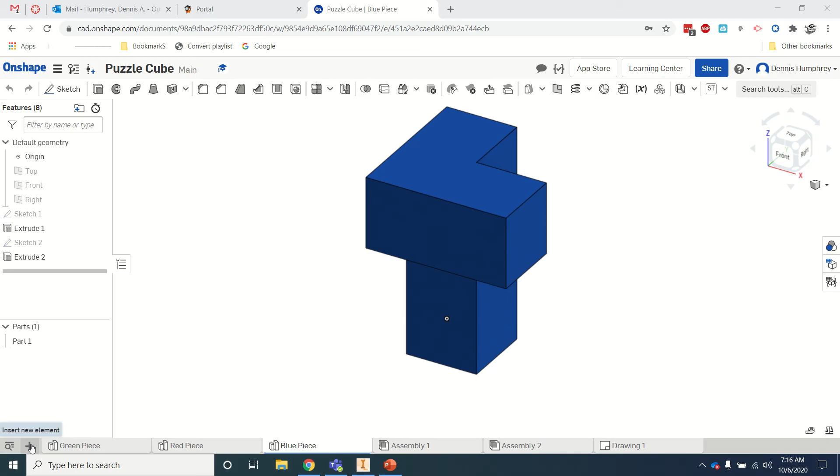Alright, so this is instructions on how to make a multi-view drawing using Onshape for your puzzle cube. Okay, I've got these same three pieces down here. To do one, I click on the plus sign down here at the bottom, and I want to create a drawing, create drawing. When I click that, this pops up.

Select the ANSI A inch. You want A and you want inches. A and C are different size sheets. C is really big and parts of it have to get scaled. A, everything fits very nicely. So I pick that, I click OK. No views at the bottom. Wait for it. And there is your drawing.

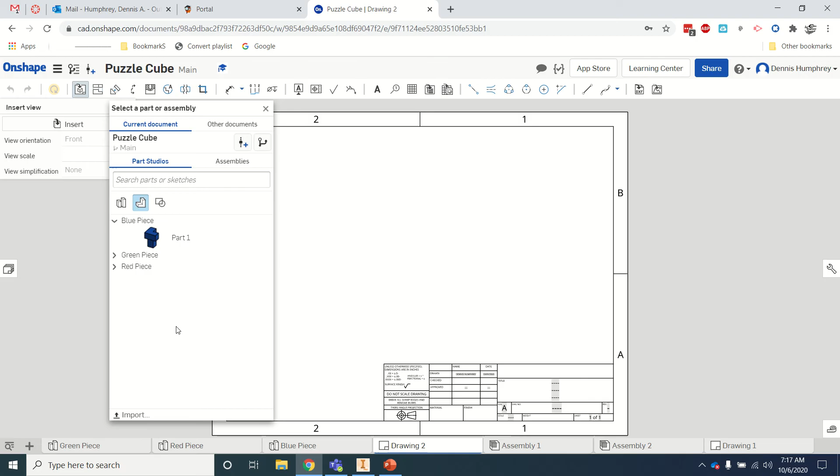So now what'll come up is this, and if you've got your pieces at the bottom, it's really easy. You select your pieces and it'll actually show you what they are. Click on one so I can see it. I'm going to do this one just because it allows me to show hidden lines. So I click that one. You start in the bottom left. So you always make your first one here. Click, left click, and there it is.

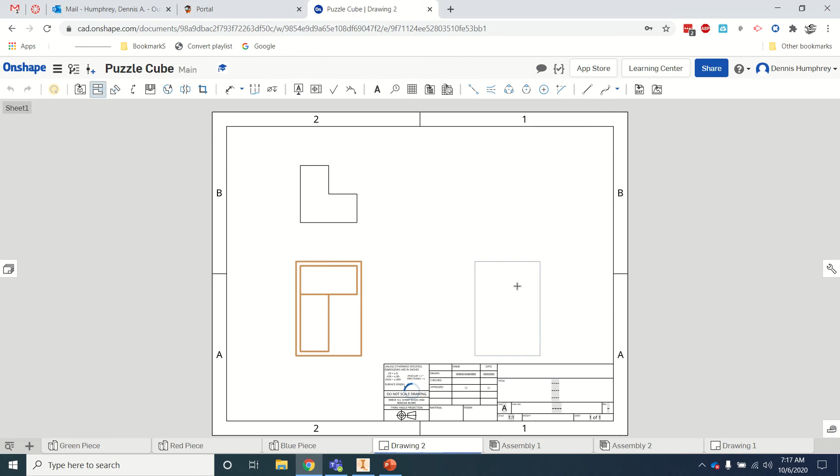Now when I come straight up, that'll create my next view, my top view. I click that once. Okay? Now I've still got, you can see the shape of this. So I click on my front view again. And now I come over here to get my right view. And I click. Okay? So that's all of those.

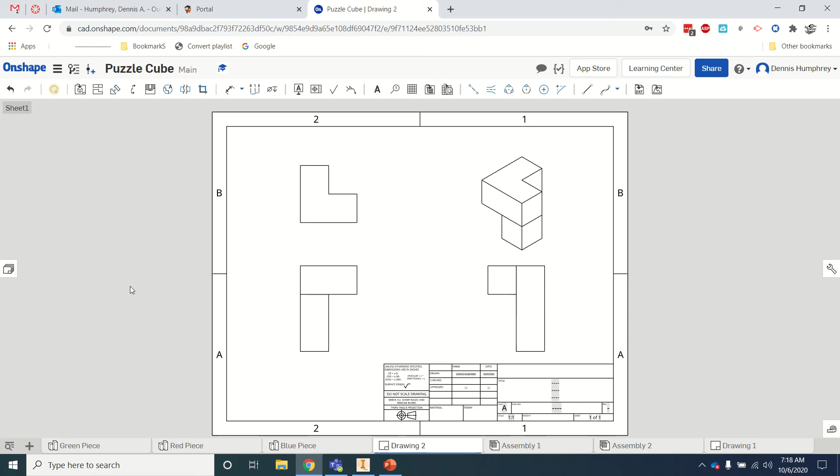We're going to do the isometric separately. In fact, we can do it right now. I come up here and click on Insert View. Click this drop down. Isometric. And that will go right here. Like that. Okay? Now, a few cleanup things here. I right click on my isometric, show shaded view. That'll give it colored. Okay?

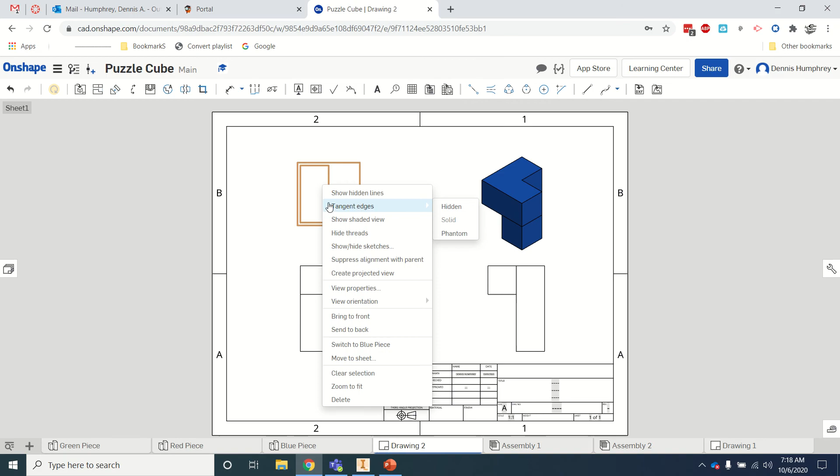I right click in here. It doesn't show it there, but it does over here. You need to right click and make sure that you get show hidden lines. When I click it here, it does it over there. Not sure why, but then make sure you've done that for every part, like this one up here also has a hidden line. Okay, realistically, this should be the front view because it has no hidden lines, but that's okay. That's a pretty decent view of it.

Okay, so the drawing is done, and now you need to do dimensions. Now later on, we'll have a more detailed thing on how to dimension. The main point is dimensions stay inside of this area here. So you don't want dimensions outside. You want your dimensions in here, just your basic dimensions.

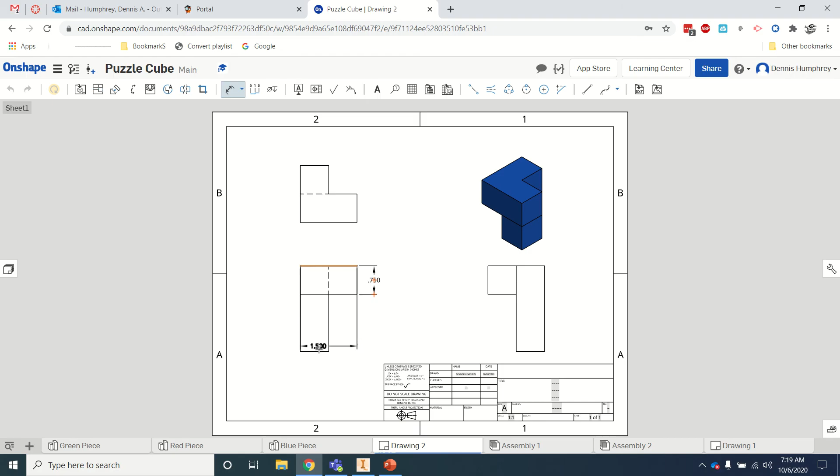So what I'm going to do, I can click this line, and I can come out a little ways here. There's my 0.75. I can click this top line, click the bottom line, come out here, and put this kind of towards the middle like that. All right. I can click this line and come out here.

Top line, bottom line. Now, it'll do different things here. Like, it may start looking like that. You don't want that. You want to be in the middle. So you want the arrows going out like this. So do whatever you need to do to get that. I need this one here. And I think that's pretty much it.

Let's see. You remember the length, width, and depth? Okay. Well, this is going in the one direction. This is like height. This would be my depth. This would be my width. And so that'll work. Sometimes you don't need any over here. Don't dimension to hidden lines, but basically that's all I'm looking at.

Nothing fancy, but I need to at least see these three dimensions. If I only see those three, I'm okay with that right now. The overall depth, the overall width, and the overall height. You can do just those three dimensions, and that'd be it. So this would be done. This is all you need.

Now you can come down in here. This is what I would like to see also, because that way I'll know it's yours. Wait, I have to hit escape to get out of dimensioning. Okay? So down here, if I click down here, you can type in your name. Got to double click. And that'll work. Check that. I can double click down here.